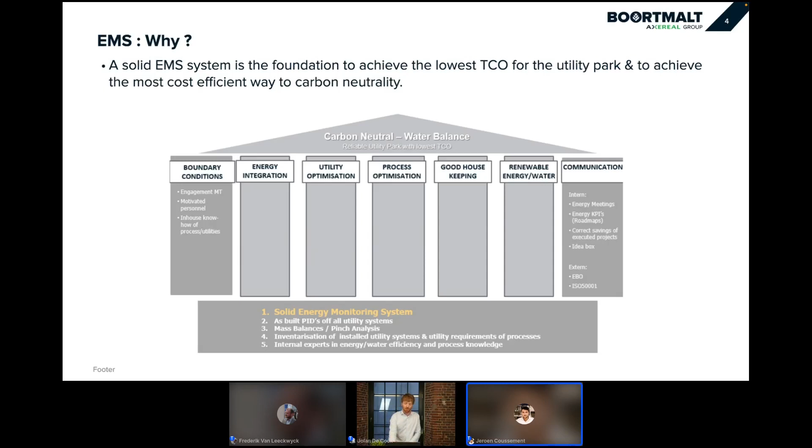And the pillars are then based on the foundation. You can optimize your utilities and processes. You can do energy integration because you have all the data available to maybe combine cooling with heating to redesign utilities. You also have the tools then for good housekeeping to track your processes, to limit energy waste. And this foundation also gives you the tools to make reporting, data for management, for operators, for production managers, etc. So it's important to have this foundation in order to build a successful energy monitoring system and to achieve carbon neutrality and a low energy cost for your production.

The why. This is one of the most important questions, raised a lot by my kid as well, the why. But here there's a lot of whys, and the first one is good housekeeping. So you have to give the tools to your operators, to your managers, to track the energy consumption, to reduce waste as much as possible in order to put KPIs and follow up the energy consumption of your critical processes. Having these energy meters and these readings also gives you an indication for preventive maintenance. Having higher energy consumption can also mean that you will have to do maintenance and can prevent a shutdown eventually.

Allocate correctly your energy cost. One product or one specific batch can be more costly. So it's important for the pricing of your products that if you go to marketing and sales, you can clearly say for this batch or this product, you have to surcharge your client because the energy cost is a lot higher. It's very important in today's market as well for procurement of energy. It's very variable now. A lot is on the spot. So the better you can forecast your energy consumption, and a time series database with sufficient meters can give you the data to do better forecasting, which will result in a better procurement of energy.

Shadow invoices, just checking if your invoices are correct with meters, that speaks for itself. And it's also a tool for design for new installations. So process and utilities. This data can give you insights for the correct capacity, but also for the redesign. It's not because it was always like that you just have to do copy paste. This data can be very valuable in the design of new projects in order to achieve carbon neutrality, for optimization of energy, etc.

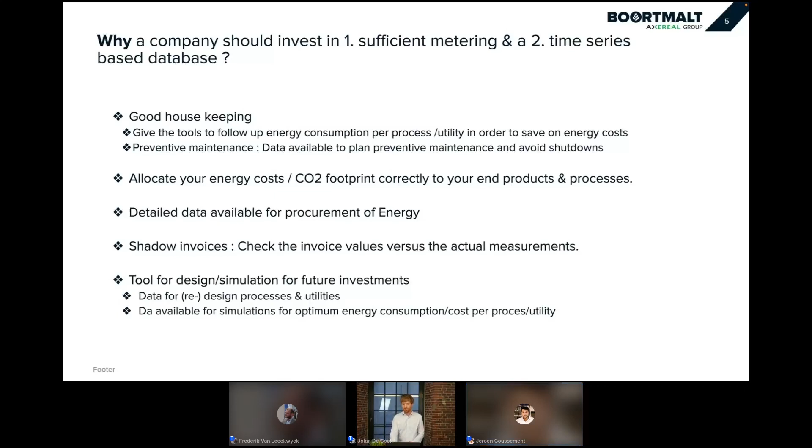So what's important over here? So you have your primary energy vectors, which is electricity, gas, or any other fossil fuel and water. This goes to your factory. You have invoices for that, and then you're producing products. A lot of companies just have those invoices, and they cannot allocate these invoices correctly to their product groups or to their batches. In order to do that, you have to map your factory.

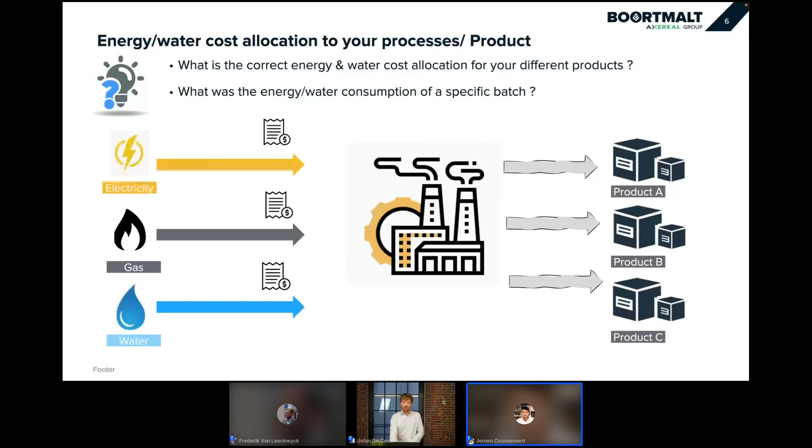Here it's seen as a black box, but you have to go in depth and map all your processes and utilities in order to allocate correctly your energy consumption to your batches or products. So how can you do that? So you have your primary energy vectors, gas, water, electricity. This is an example. Every plant is different. These can go directly to your processes. You have to map your process. It can be 12 processes, 15 processes. The site people know the process, your plant the best.

And the most important one is the utilities. You need heating and you need different temperatures. So you will require steam. Maybe you need hot water. You will need cooling. You will have different cooling circuits. You will need compressed air. You have a wastewater treatment plant. Utilities are really important to map in a correct way and are also very important to track their efficiency. They are mostly the biggest energy consumers in your factory. So it's very important to track their efficiencies.

And for example, for heating steam, you can map then the gas consumption versus how much heat you produce. For the cooling installation, you have the efficiency, the COP they call it, is how much cooling do I make and how much electricity do I put in the compressors. So all these ratios are important to track your efficiency.

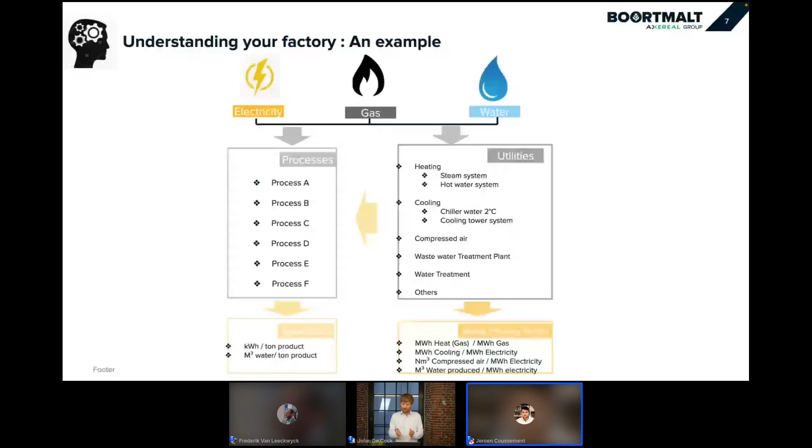Then to correctly allocate your energy costs to your products, you will also have to allocate the consumption of your utilities to your processes, because your processes will require heat, cooling, compressed air. So to do the energy allocation correctly, you have to allocate that to your processes. And in the end, then you will have ratios. How much did process A use? Megawatt hour gas per ton of product, cubic water per ton of product, electricity per product, and so on. So this is key, analyzing your process, your utilities, in order to have a correct breakdown of your energy streams.

This is an example. I could make 20 examples. It's a quite simple example. It's, for example, when you have a steam boiler. If you have a steam boiler, you will have gas going through it, which is the main consumer, it's the most costly consumer. You will have electricity and water. So you should install, of course, a gas meter, if possible, an electricity meter and a water meter. In the end, you will be producing steam. So you have to install a general steam meter. And then for each significant consumer, you should install also a steam meter.

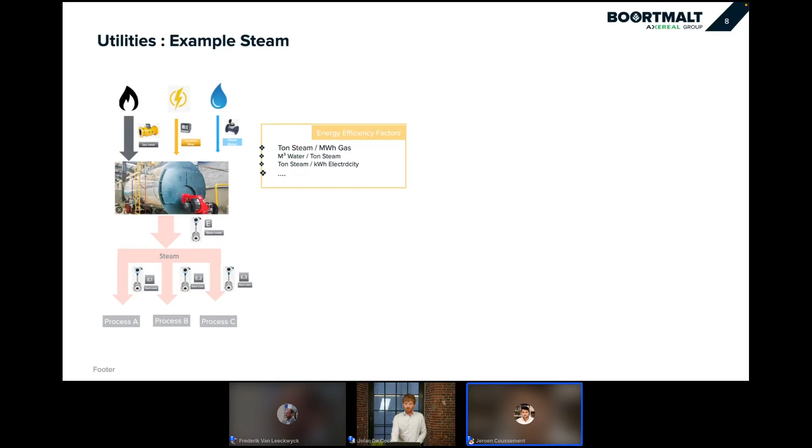What does this information give us? So based on the first meters, so the gas, electricity, water, and what you produce by steam, steam is your output, you can have efficiency ratios. So tons of steam per megawatt hour of gas, cubics of water per ton of steam, etc. So you can track those, you can put KPIs. If they deviate, you have to explain them. And that's why you need even more data. Then you need specialists like a utility engineer or a technician to explain why these ratios deviated.

And it can be several things. For example, you can track your flue gas temperature when it's too high. Maybe your economizer was not working properly. You can have the air temperature going to your combustion that is lower. So the important thing is that you will need a lot more data in order to explain why your efficiencies were deviating.

If you have sufficient meters, you can also calculate the leakage. Because in a steam network, you have condensate traps that can be leaking, you can have valves that can be leaking, and when you trend this and you see a deviation, it must be that something is leaking or a condensate trap needs to be repaired, and this can be a huge cost for the company.

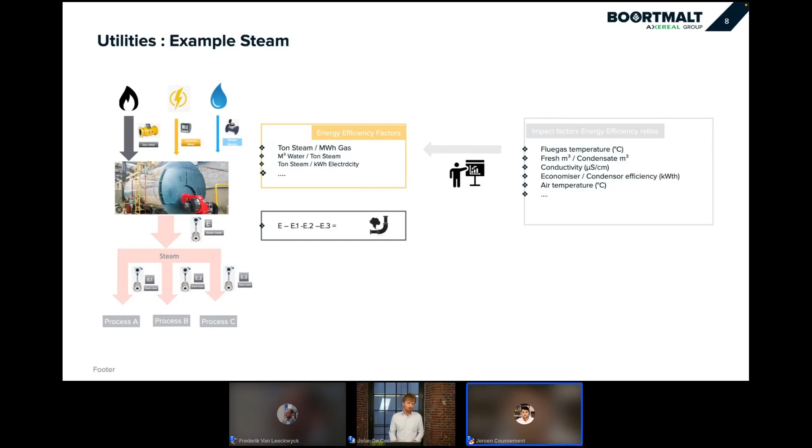Looking then at your intermediate meters, so steam meters per process, then by allocating, you can allocate correctly your gas, electricity, and water consumption from the utility to the process to have a correct costing per product group per batch. So this all combined gives you data for good housekeeping, also for investments.

It's not because you have a 20 megawatt boiler that you actually need it. So you could optimize your consumption, maybe make a hot water grid and a steam boiler, because maybe the majority of your processes need below 100 degrees, which gives opportunities for decarbonization, and also the correct cost allocation for each product group and batch.

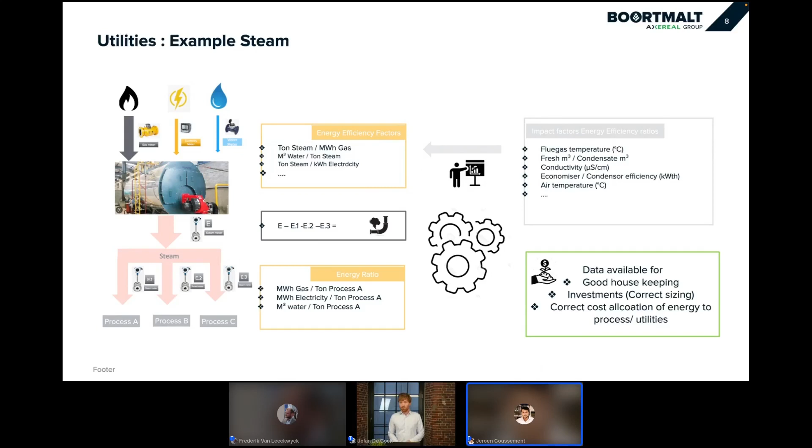The key takeaways here: you will need a lot of meters, and these are key. If you don't have meters, you cannot build up an energy monitoring system, and it's pointless to have a time series database. You will also need product information, volumes. The more data you have, the better you can also explain the ratios.

Before you start with the exercise, really involve key personnel in order to map your whole plant, your utilities, and your process. This will also give you insights in where to place the meters, because these people will know this is a main consumer, this is a small consumer, don't consider it. So when installing meters, start small and really focus on the big consumers. So have a phased approach. First we focus on the main meters, and then we go for the smaller consumers.

Utilities, these are the key. It's the biggest energy consumption, and also most optimizations are possible there. So spend sufficient time on mapping the utilities. The tools have to be used. So when you install the meters and you have a time series database, the personnel has to be involved.

So it's important that from the start of the project, you involve every layer of the organization, from shop floor to management. Especially the people on the shop floor, they will be following up the consumption, and they will have a lot of knowledge about the process. So my advice is involve them in the whole process, because it will give you a better end result.

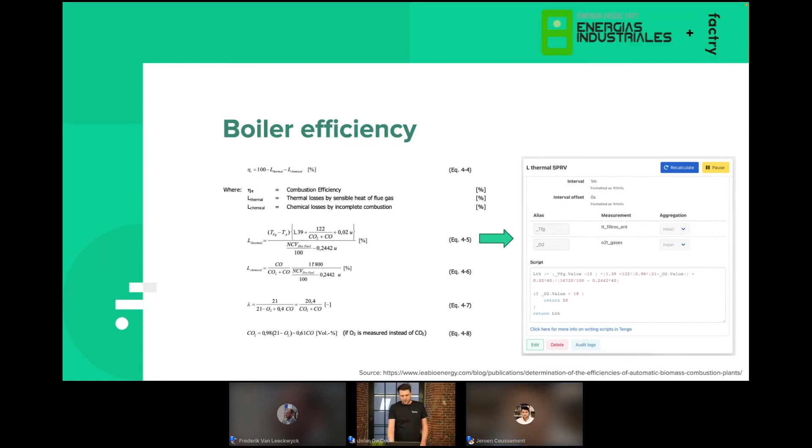But the main concept here is that we take these formulas and transform them into a calculation in Historian. So we can, in real time, continuously calculate this efficiency and closely monitor it in order to be able to react when it would drop. The result is very largely visualized here, but in one look you see the current efficiency and how it evolves over time. This is very valuable for the people in the plants because it's real time. As soon as something goes wrong, you can react and maybe avoid future problems, compared to when you would only know the efficiency from some Excel calculation of yesterday. So visualizing these key parameters derived from your data set is really important in terms of reaction time and follow-up of the process.

So the benefits: more efficient and informed communication, and identifying problems before they become serious or while you still have time to react. You can also use these KPIs, as they are logged historically, to follow up on potential improvements you have made. If you've made an improvement to the process, this should be visible in this KPI over time.

A last step in this data-driven approach is the detailed energy allocation. You can see here, again, an example. I have two measurements coming in. My energy consumed can be gas, steam, or electricity, so basically an energy resource, and a quantity of material that I have produced. This information is useful, but it doesn't allow me to ask a question. I don't know which product was active at which time, which recipe was active at which time, and so on. So basically, I would need to add context to this information.

How can we do that in Factry Historian? Well, I can add an event type for the entity I want to report energy on, in this case, a batch, but it can also be production shift or production week, for example. I define some properties on this event, like the energy consumption, quantity produced, and then I basically map those events on my asset tree, my hierarchy of the plant.

So I can map my factory, I create the production lines, which of course reflect the real life scenario. And then I define how these events should be detected. For example, I can detect a batch based on certain parameters. If a machine is in a certain status and the speed of the stirring is above a certain threshold, then I see that as the start of a batch and some other parameters for the end.

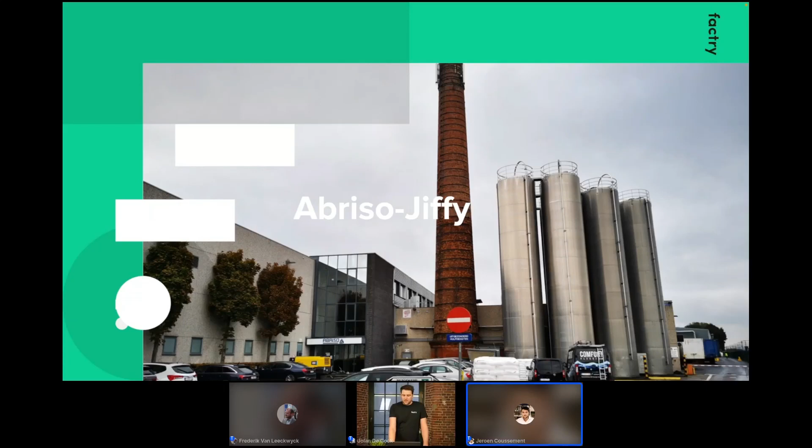So I detect these discrete periods and then I calculate my energy, my quantity, and so on on top of that, which basically gives me the data I need to do energy allocation. An example here at one of our clients is Abriso-Jiffy. They make insulation material and protective packaging here in Belgium as well. And an example we've been setting up there is to calculate the energy used per batch as well.

Now, one thing specific here is that they have a production hall with 2 production lines, 2 extruders, but they only have the energy usage of the whole hall. So what we do, by means of calculations, is to create a virtual meter per production line, in which we allocate a part of the total hall energy usage by using some kind of weight based on the power usage of certain equipment.

So we derive a ratio of energy use that is then associated to line 1 or line 2. So we basically create a virtual meter. You can see that in a lot of scenarios where not the whole process is instrumented with energy meters, that some energy meters are derived from the consumptions of other meters.

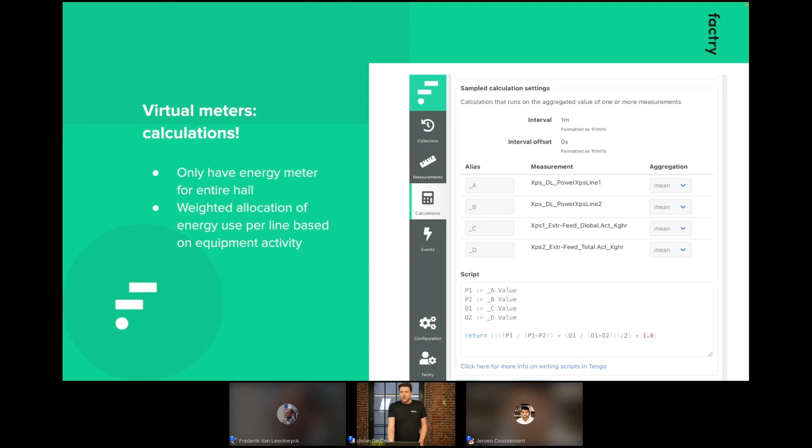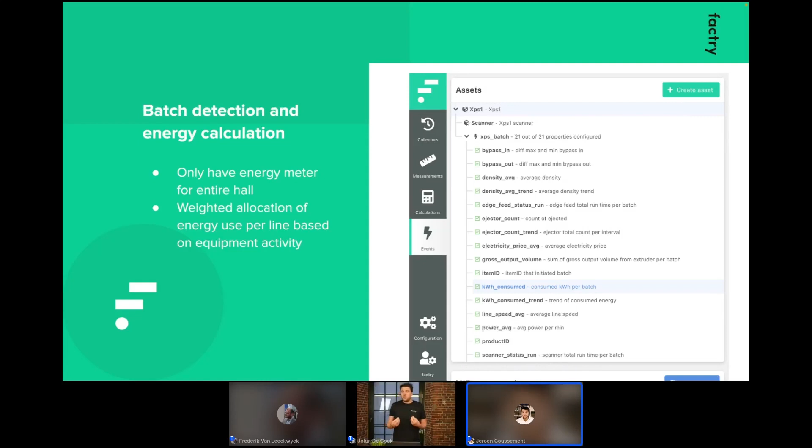In a second step, we modeled the plant and then created this batch event and calculated a lot of properties on those events. And then one of the properties is again kilowatt hour consumed, so the energy usage per batch. The result here, it's a little bit small, I realize this. So you have the production process, and you can see in the top table each batch that has been produced. So each line represents a batch.

We can perfectly see on which asset it was, what the batch ID was, which product was running, and also how much energy was consumed. If we then associate this also to the cost of the energy, we can very easily determine an actual energy cost per, in this case, cubic meter of produced material. We are using batch detection now. As I mentioned, you can simultaneously also detect production shifts or other events within the plant and do these exact same calculations on top of that entity in order to have as broad as possible reporting of your energy usage.

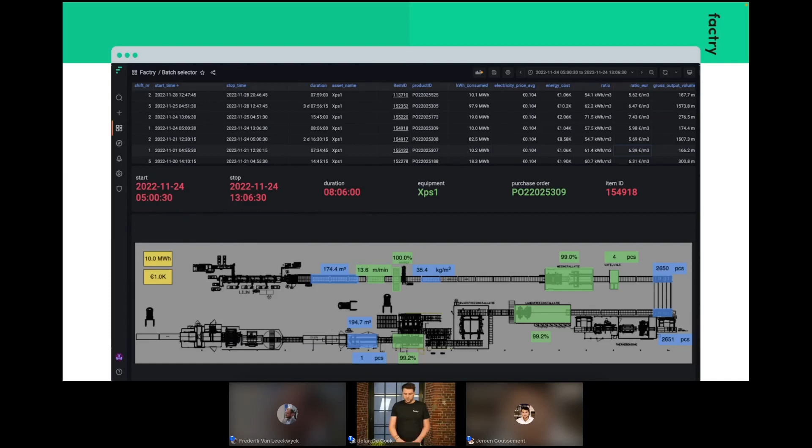So what are the benefits after applying this? Well, direct energy cost per product instead of a generic estimate across all products. You can compare the impact of different dimensions on the energy use. So for example, it could be that you produce the same product on 2 or 3 different equipments in the factory. You can compare the energy usage by asset. So for example, maybe one asset is using more energy than the other 2.

You can compare the impact of recipe parameters and also follow up potential improvements you made to those parameters over time. So if you see that a certain recipe is using more energy, you make some modifications. Now you can perfectly follow up for future productions whether or not this change had any effect.

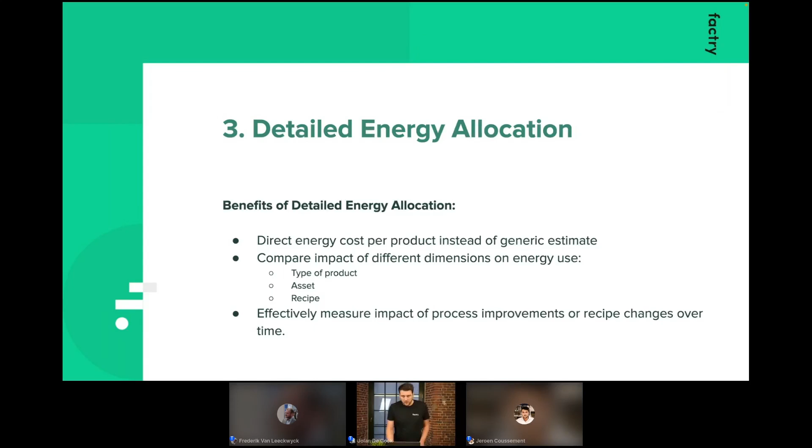That brings us to the end of my story. So 3 steps from simple to more detailed in terms of processing data for energy allocation. The key takeaways I would like to summarize: build a solid data foundation, that kind of speaks for itself, but don't do this exclusively for energy. Because if you really want to do allocation, you also need other data within the process, product IDs, recipe parameters. So basically, don't restrict yourself to just energy, because you need a lot more context than that.

I think Gianni also mentioned this, work iteratively. It's not wise to do everything in one go, because you won't be able to find any nuances anymore. So work iteratively, create value at each step, and involve key people in the plant to create the necessary involvement and engagement so that they see the value of what is being done.

And then third and last, go for open software and systems, because there is no one-size-fits-all solution or one product that is capable of doing everything. And in the future, we will need more and more data and software systems working together. So it's really important that if you invest in software, make sure it's easily integratable with other potential solutions towards the future. All right. Thank you for your attention.